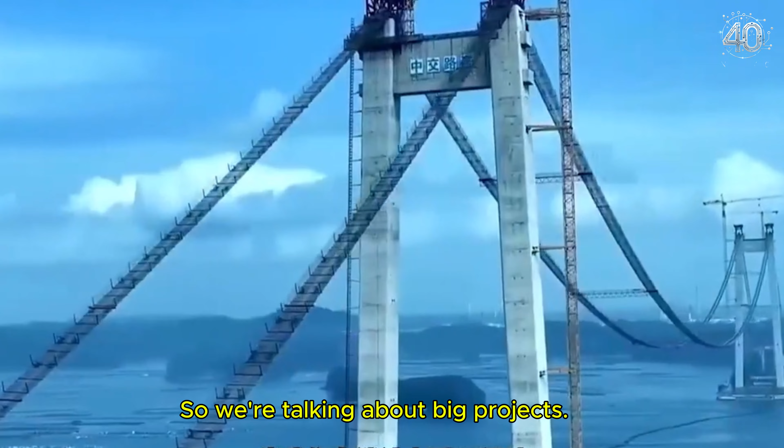Chinese engineers have always been known for their amazing construction speed, building incredible engineering projects. World-renowned Chinese engineers are like superheroes in construction. They are actively involved in building large engineering projects to accommodate their country's growing population and rapidly advancing economy and technology across the vast land of China. Bridges and dams are not just a link between two sides of a river, they are also a shining pearl of Chinese engineering technology.

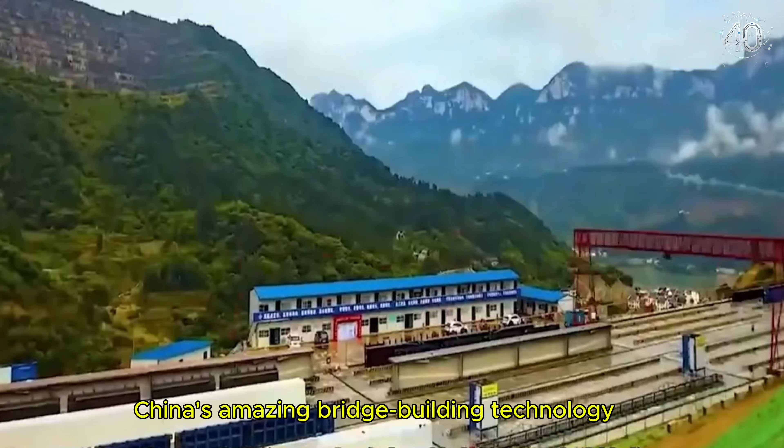Let's experience it together today: China's amazing bridge building technology, and a super dam on a river.

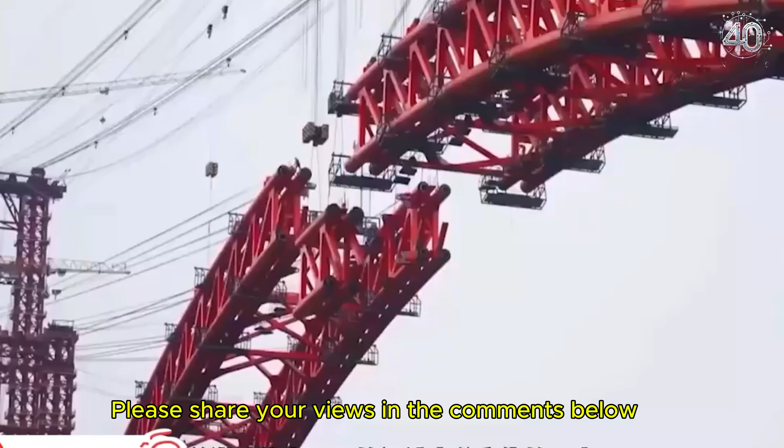Not much to say, let's start an extraordinary journey. So let's start with bridges, as the crystallization of human wisdom, vividly displayed in China.

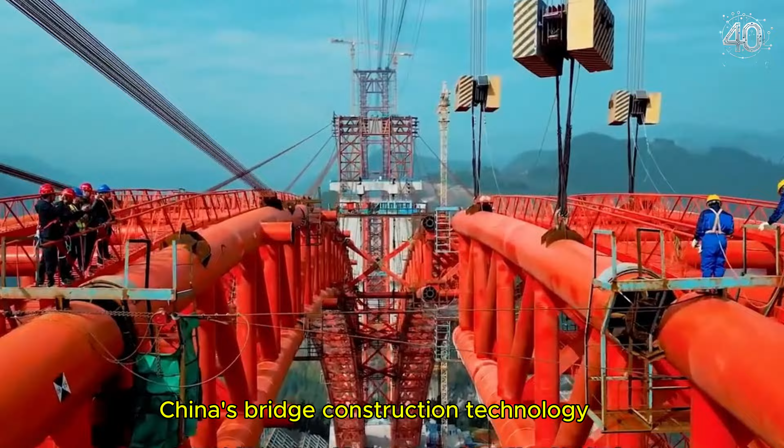From the ancient Zhaozhou Bridge to the modern Hong Kong-Zhuhai-Macau Bridge, China's bridge construction technology is already at the forefront of the world. Every bridge is an epic, recording the hard work and wisdom that creates the Chinese people.

From the ancient Zhaozhou Bridge, with its unique arched structure and exquisite stone carving art showing the wisdom and ingenuity of the ancients, to the modern Hong Kong-Zhuhai-Macau Bridge, with its massive scale, sophisticated technologies, and innovative ideas, it has become a wonder in the history of world bridges.

This bridge not only connects Hong Kong, Macau, and Zhuhai, it also shows that China is a leader in the field of modern bridge construction.

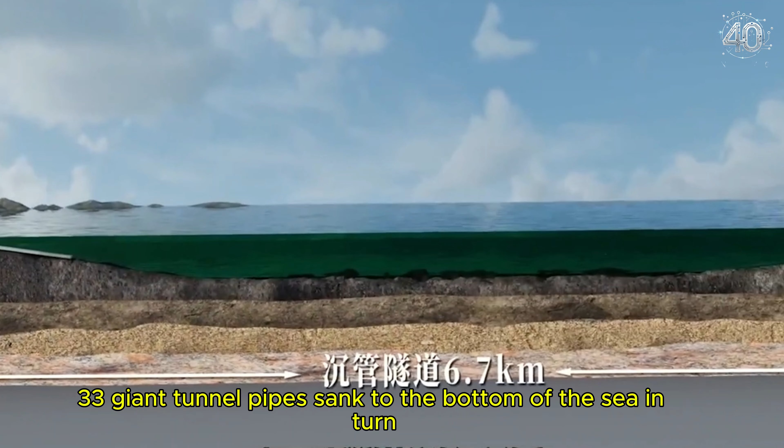The Hong Kong-Zhuhai-Macau Bridge crosses the sea and gradually sinks into the water at its submerged terminus. 33 giant tunnel pipes sank to the bottom of the sea in turn, forming a 6.7-kilometer long underwater tunnel. The tunnel not only leaves enough room at the sea surface, it also greatly reduces the impact of the structure on ocean currents.

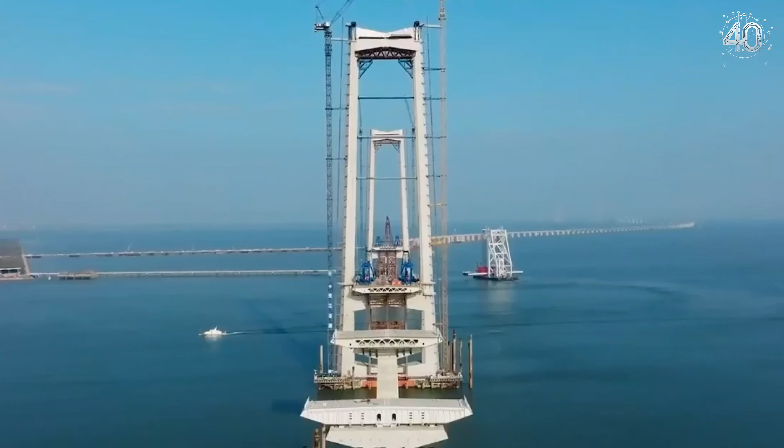Artificial islands on both sides secure the undersea tunnel and create a seamless transition between connecting bridges. Through this combination, the longest sea bridge in the world opened a path across the vastness of the sea. In addition, the Shenzhen-Zhongshan passage is under construction.

It's also a great miracle in the history of China's bridge construction. The Shenzhen-Zhongshan corridor connects Shenzhen, Guangdong, and Zhongshan City, featuring a 270-meter high bridge tower.

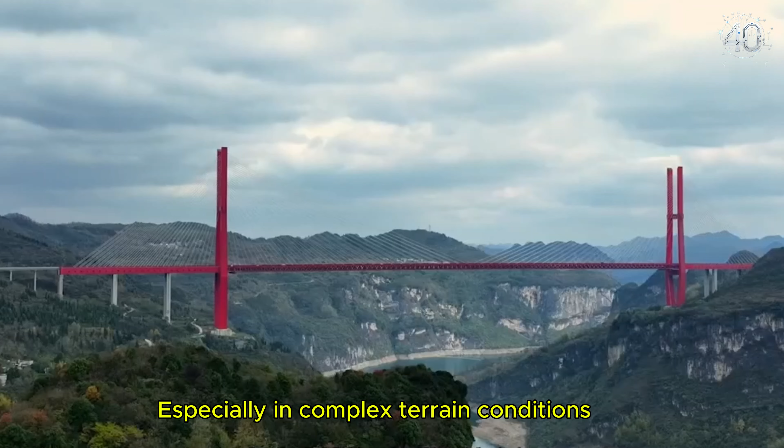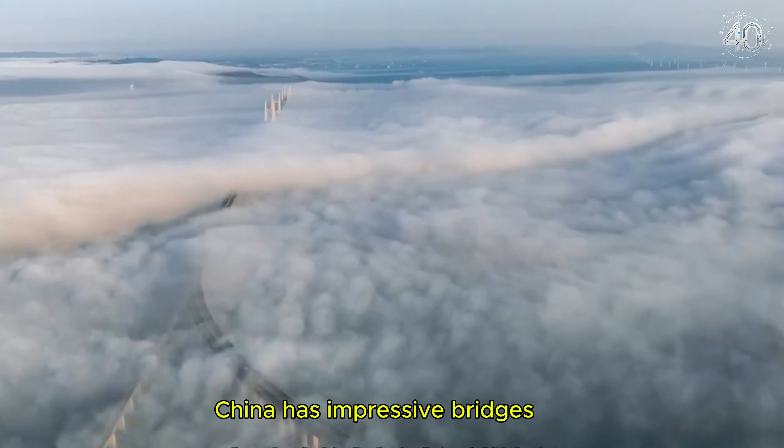They not only solved technical problems, they showed the world the grandeur of Chinese bridges. So far, China has more impressive bridges than any other country. But have you ever considered that every bridge has its own unique story?

The Beipanjiang Bridge is located at the junction of Yunnan and Guizhou provinces. It is one of the tallest bridges in the world, with the bridge deck to river surface up to 565 meters.

That's 200 stories tall. However, in the eyes of American media, this bridge was labeled a copy, publicly questioned and ridiculed by American experts over the speed at which it was built. They believe China cannot rely solely on its own efforts to build such a spectacular project.

They claim it must have copied American design and methods. This statement shows not only a lack of understanding of China's construction level and innovation, but also downplays China's truly amazing development.

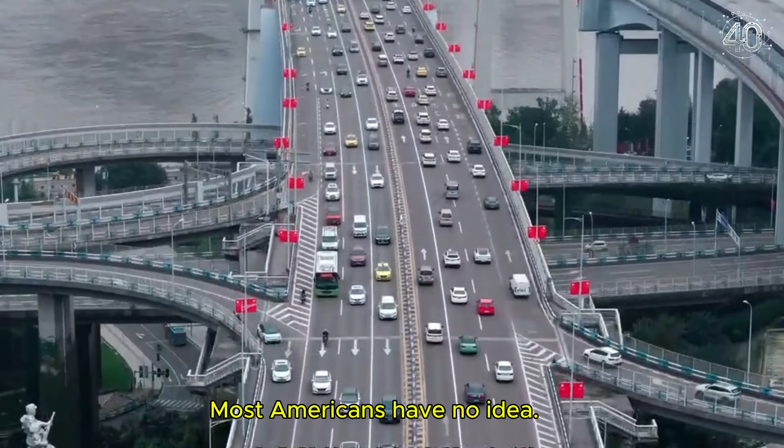Most Americans have no idea how China has developed now, and to what extent the world has been amazed.

America should be inspired by China, and learn from them, rather than demonizing them and making them enemies of the United States. China is a model of hard work and dedication.

This used to be an American value. China is also a good example, explaining what happens when the government allocates resources focusing on the best interests of the people, rather than diverting resources to wars with the rest of the world.

Anything is possible. So is the Beipanjiang Bridge really copying American technology? Is China really incapable of building such a bridge? Let's uncover the truth together.

China's involvement in bridge construction has a long history and rich experience, achieving many independent design and technical achievements. China is a land of bridges.

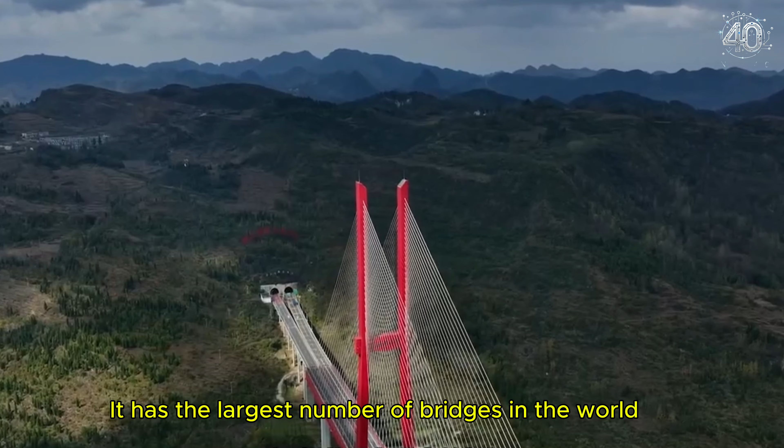It has the largest number of bridges in the world, with huge scale. Bridge construction is an important support for China's economic development, and also the essence of Chinese engineering technology.

Americans didn't want to believe that China, which they believe is still far behind, could build such an amazing bridge in just 3 years. But the results of the field inspection by the expert group went beyond their imagination.

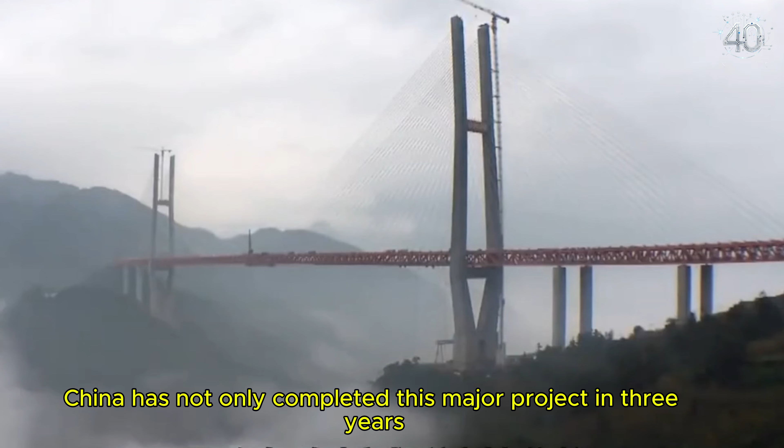China completed this major bridge construction project in 3 years, breaking several world records. The total length of Beipanjiang Bridge is 1,341.1 meters, adopting a 4-lane standard. The design speed is 80 kilometers per hour, costing 1 billion, built with a variety of advanced technologies.

So techy. Since its construction, the bridge not only optimized the traffic environment between the two places, but also ended the history of Xuanwei and Shuicheng being blocked off from the expressway.

However, before building this bridge, due to the complex topography of the Beipanjiang area and bad climate, the Yunnan-Guizhou Plateau belongs to the mountain type, the road is bumpy. Therefore, residents on both sides of the canyon could only travel between the two places on foot, and the economy was lagging behind.

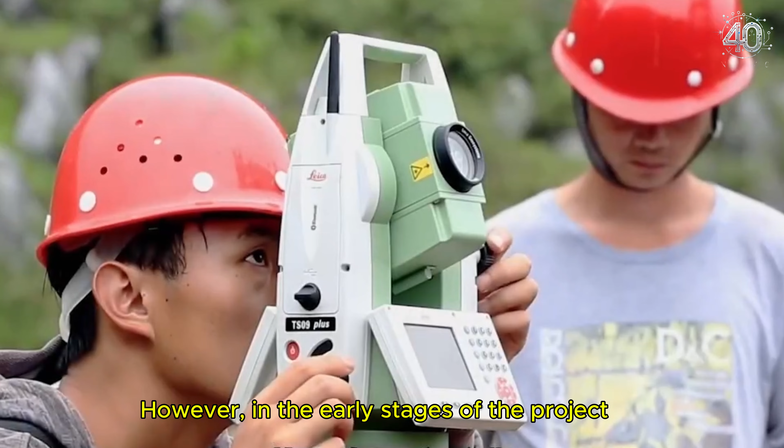To improve this situation, China decided to build a canyon bridge between the two places. Since then, the Beipanjiang Bridge gradually began to take shape. However, in the early stages of the project, it aroused many doubts and ridicule internationally.

This also originates from the junction of the two provinces, where the environment was extremely hostile, with caves everywhere. The difficulty and danger of construction can be imagined.

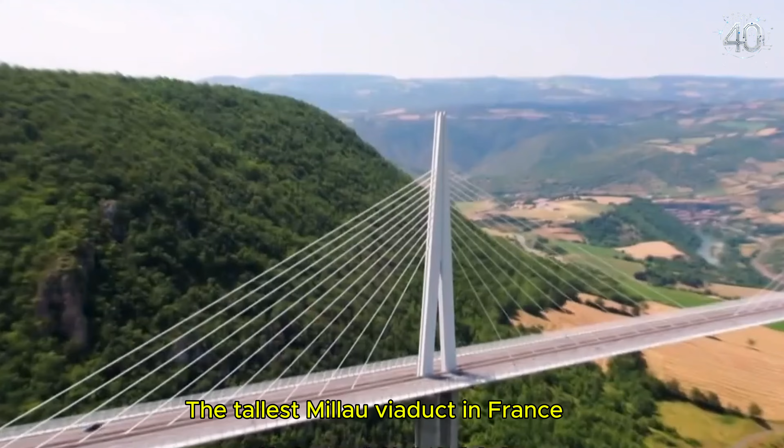At the same time, the bridge deck design called for a distance from the river of 565.4 meters - that's the height of a 200-story building, almost 300 meters higher than the tallest Millau Viaduct in France. For China, this is without a doubt a whole new challenge.

Facing these world-class challenges, how did China overcome them one by one? Let's start with this.

Only the bridge deck can be raised. However, caves are prone to collapse during construction, which had a huge impact on construction.

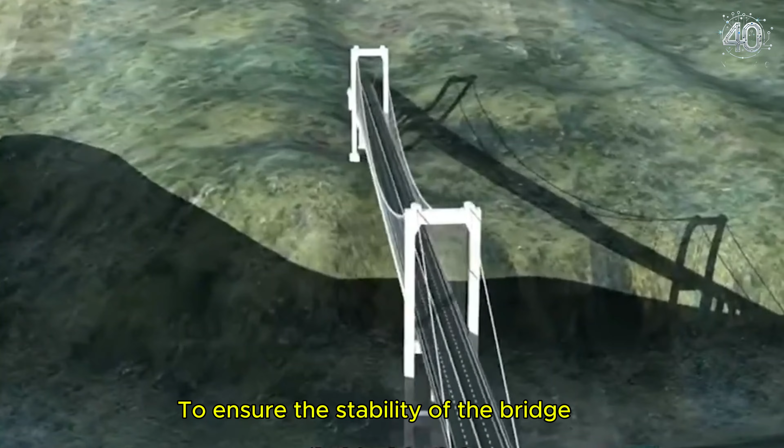To ensure the stability of the bridge, Chinese engineers initially planned to build a suspension bridge, but shipping large quantities of materials proved difficult. So the technical team overturned the idea and adopted a cable-stayed bridge design instead.

They connected the bridge deck by supporting steel cables. This approach is also known as a cable-stayed bridge, using cables to pull up the deck.

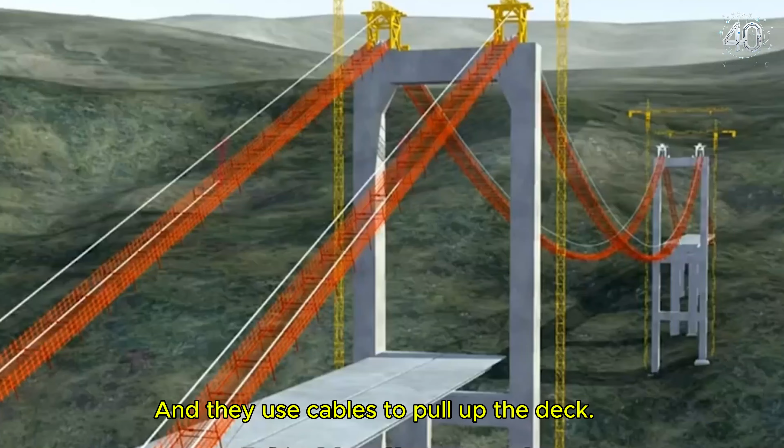The Beipanjiang Bridge uses a total of 244 cables, each with a diameter of only 5.1 millimeters. Their tensile strength exceeds 1,860 MPa, far exceeding international standards.

After solving this puzzle, they encountered new challenges and problems. No matter what kind of suspension bridge is built, engineers use an anchor pier - this core component is the main girder support of a suspension bridge.

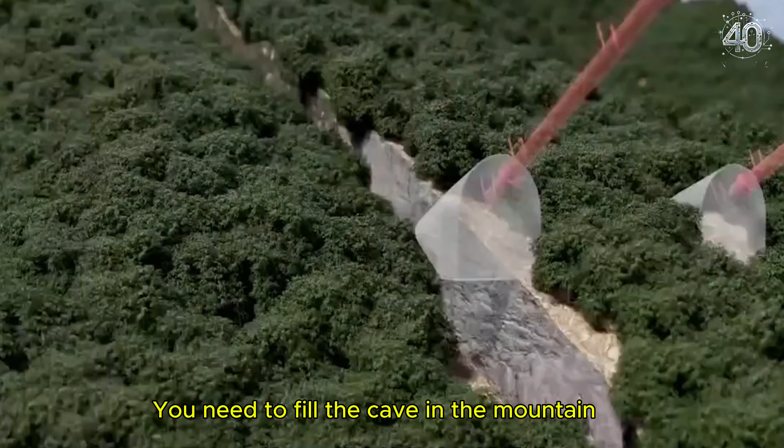If the Beipanjiang Bridge also used this component, they would need to fill the caves in the mountain and construct tens of thousands of square meters of concrete on both sides of the bridge. But doing so would greatly upset the balance of the mountain.

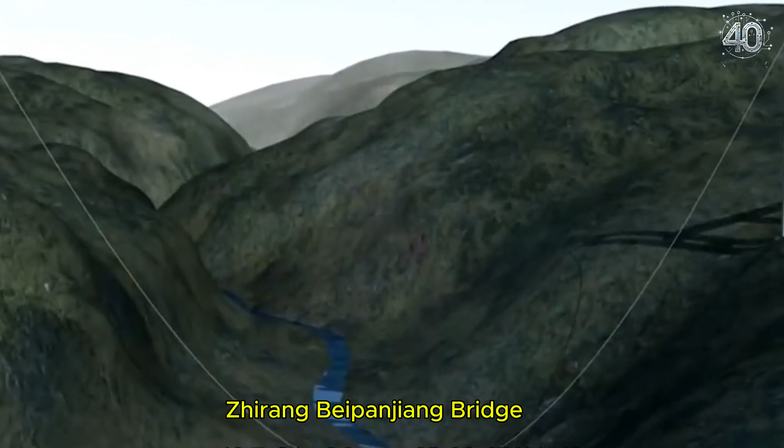To avoid damaging the mountain, experts came up with a bold new approach: building cable bridges. They designed the Beipanjiang Bridge with auxiliary piers, taking the piers on both sides as a guide.

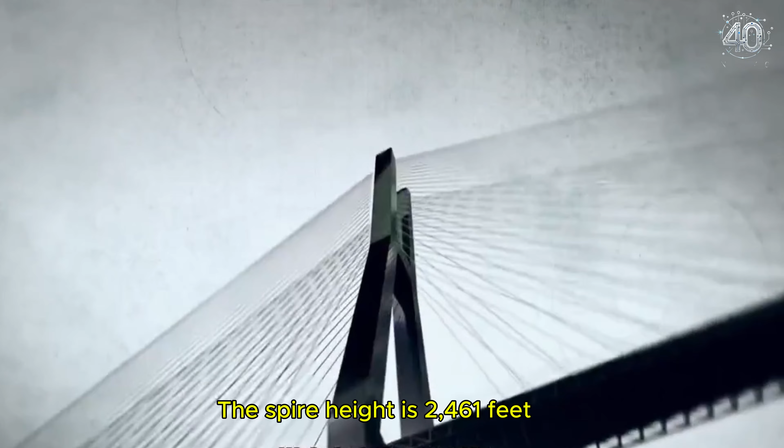However, this brought new challenges to the height of the bridge. Even with innovative design, the bridge deck is still close to the ground - 100 meters high. The spire height is 2,461 feet from valley to spire, equivalent to two Eiffel Towers combined.

And the bridge deck has to bear a weight of more than 52,310 tons. Such tolerance is equal to the weight of 5 Titanic ships combined.

So the pier should not only play a supporting role, but also needs to withstand the huge friction generated by the horizontal movement of the steel balance beam. It's very hard to do.

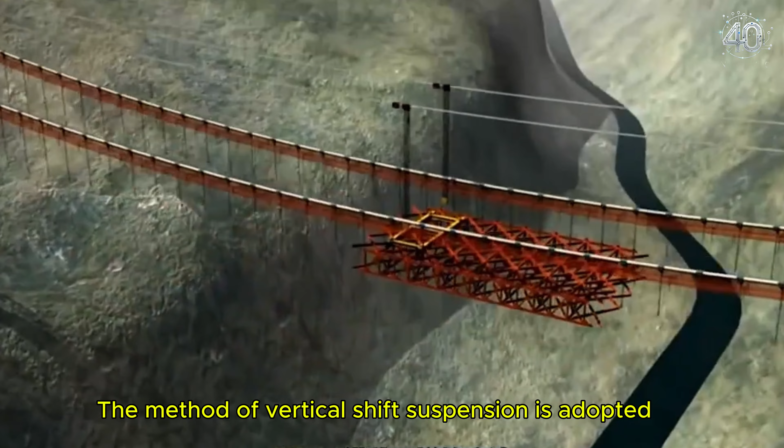After much discussion, Chinese engineers decided to give up this practice. The method of vertical shift suspension was adopted, and multiple computer simulations were run to ensure the security of the program.

When connecting bolts to steel beams, the construction team made a decision that broke with tradition, using plastic bolts instead. This move was also met with many doubts.

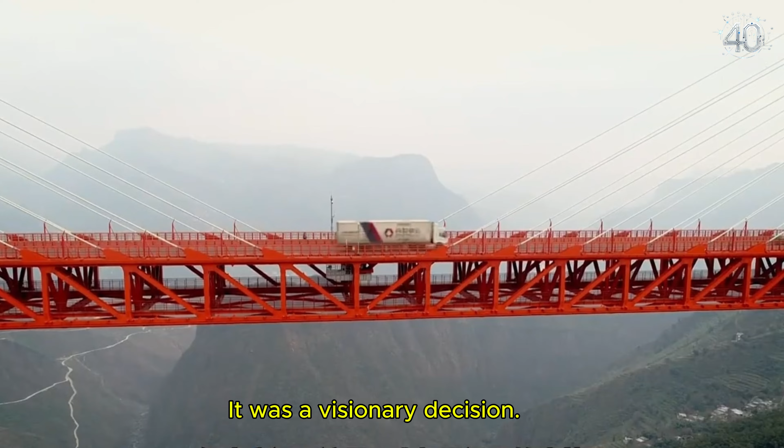But it turns out it was a visionary decision. After many comparisons and tests, Chinese engineers discovered plastic bolts are effective in terms of wear resistance and rust resistance, better than iron bolts, greatly improving the wind and earthquake resistance of the bridge, and extending its service life.

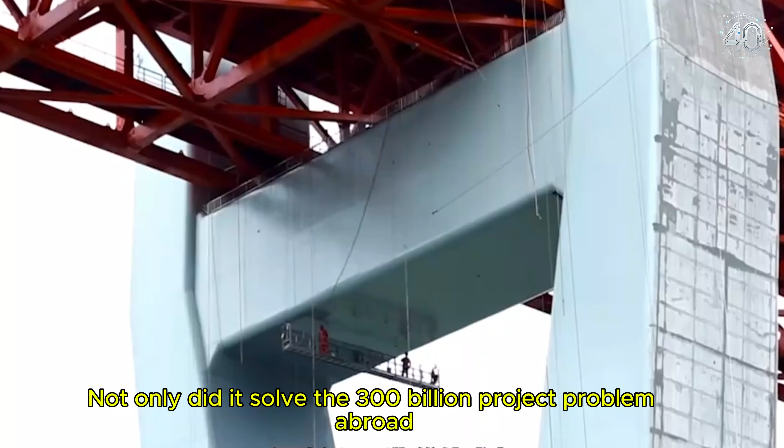So this little piece of plastic not only solved a problem that had stumped a 300 billion dollar project abroad, it also decreased post-maintenance costs. The Beipanjiang Bridge also uses a large number of cutting-edge technologies, using the latest scientific research findings, simulation analysis by computer, and pre-demonstration through 3D modeling.

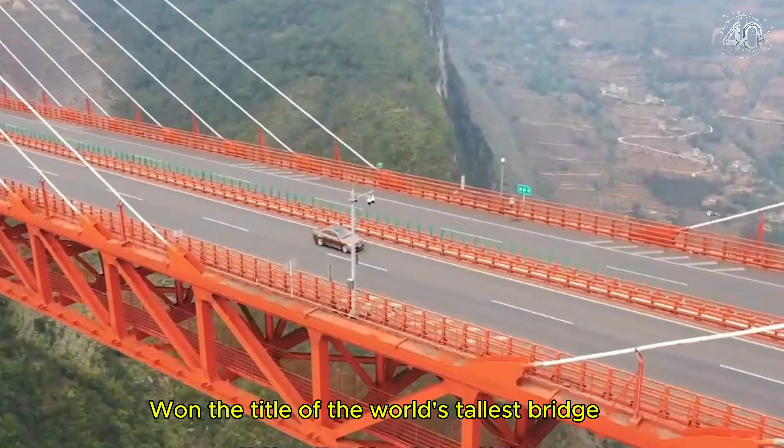After 3 years, the construction of the Beipanjiang Bridge was completed in 2015 and opened to traffic smoothly. In 2018, at the 35th International Bridge Conference, it won the Gustav Lindenthal Medal and the title of the world's tallest bridge, alongside the Sidu River Bridge - a magnificent suspension bridge characterized by its unique construction method, which became the focus of the world's attention.

In the history of bridge construction, he introduced rocket technology for the first time, to deliver the pilot cable, accomplishing this unprecedented feat. The bridges use heavy steel cables.

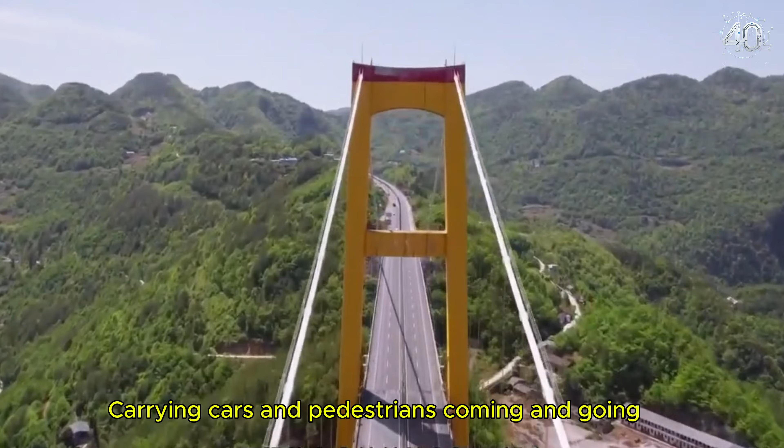Standing in the canyon like two dragons, they are composed of tens of thousands of tons of high-strength steel wire woven together. It's sturdy, firmly fixed on the piers on both sides of the river. These cables hang down from the main cables, connected to the bridge like countless life lines, carrying cars and pedestrians coming and going, guaranteeing their safe passage.

However, during the construction of this bridge, engineers faced tremendous challenges. Before laying the main cable, a pilot cable must first be sent to the other side of the canyon. The task seems simple, but it's hard.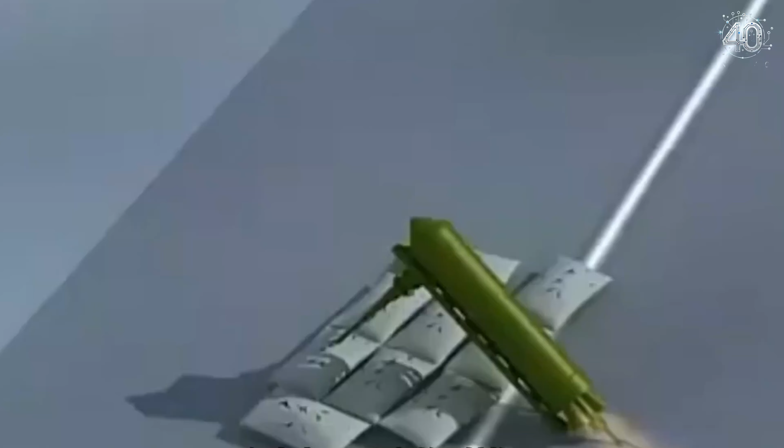They thought it through carefully, and finally came up with a bold and innovative solution: rockets are used to transport the pilot cable. It's a crazy idea, but through the ingenious ideas of Chinese engineers and bold innovation, it became reality.

Engineers communicated with nearby garrisons and acquired a military rocket. Then they replaced the warhead with a lead wire. After orchestrating and preparing, the rocket successfully carried the pilot cable and sent it to the other side of the canyon.

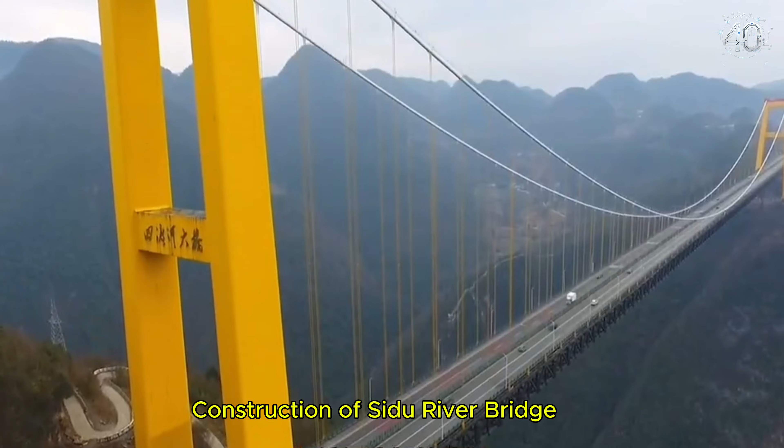This innovative solution not only solved a major problem in the construction of the bridge, it fully demonstrates the wisdom and huge innovation ability of Chinese engineers. The construction of the Siduhe River Bridge was ingeniously conceived by Chinese engineers, and the fruit of bold innovation had a huge international response.

Many international bridge experts said they never thought of it before, that they could use rocket technology to build bridges.

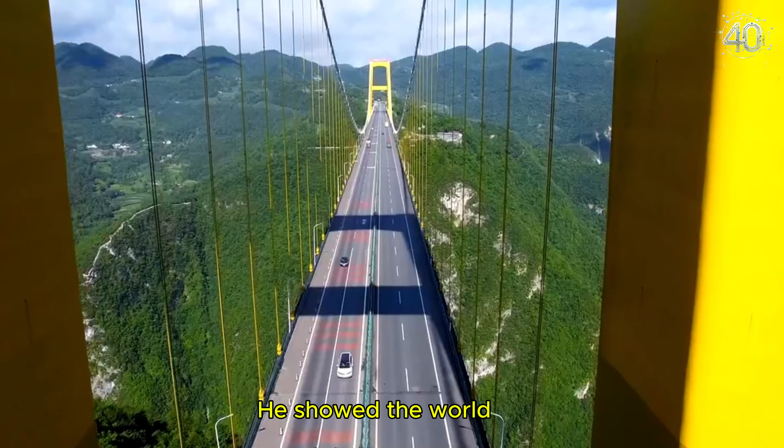This bridge is not just a transportation hub connecting the two sides of the strait. It is also a symbol of the wisdom and innovation of Chinese engineers. It showed the world China's leading position and strong strength in the bridge construction field, and also provides valuable experience for future bridge construction.

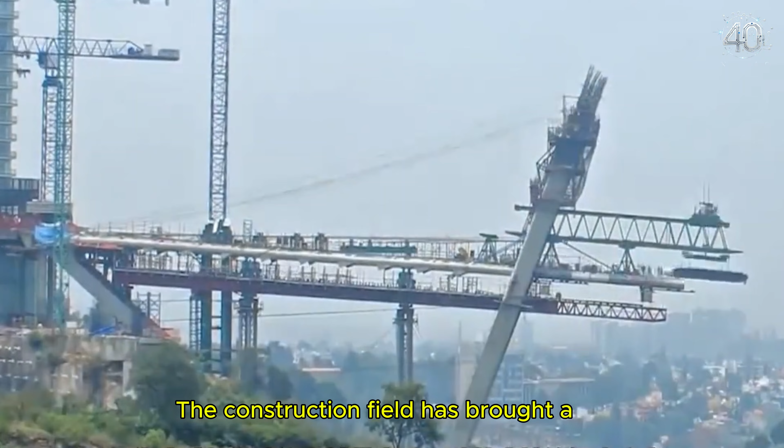Construction of the Siduhe River Bridge not only highlights the excellence of Chinese engineers' innovation ability, it has also brought a revolutionary solution to the global bridge construction field. Although Chinese engineers made this technology public, due to its high requirements and difficulty, there are no other bridges yet worldwide that use the same technology for construction.

This allows the Siduhe River Bridge to remain the only one in the world built using rocket technology, a unique status for the bridge.

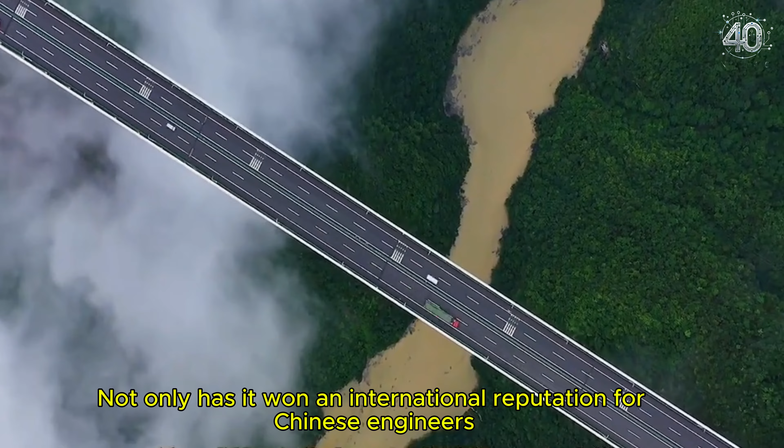This achievement has not only won an international reputation for Chinese engineers, it also impressed those in Western countries who used to despise Chinese technology. They have to sigh that China's innovation strength has stood at the forefront of the world.

As a shining pearl of technological innovation, the bridge serves China on the global stage, establishing a new image and demonstrating the growing national strength and technological strength, comparable to bridges and China's mega dams.

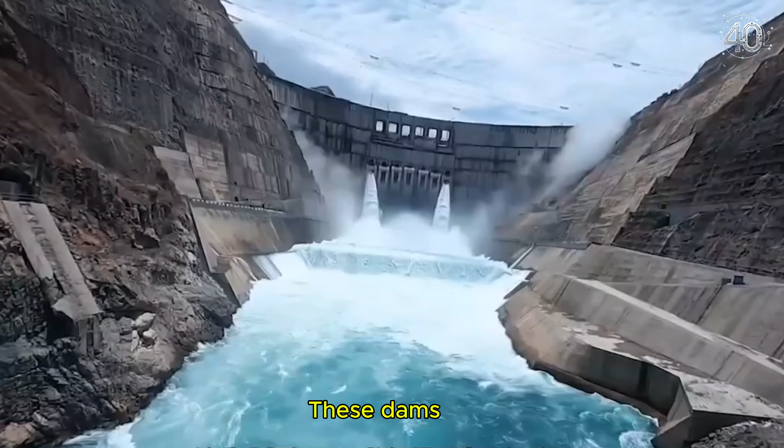These dams, lying on the river like dragons, regulating the flow of water, bringing fertile irrigation to the Chinese people, and clean energy. From the Three Gorges Dam to the Beipanjiang Dam, every dam is the pinnacle of Chinese engineering.

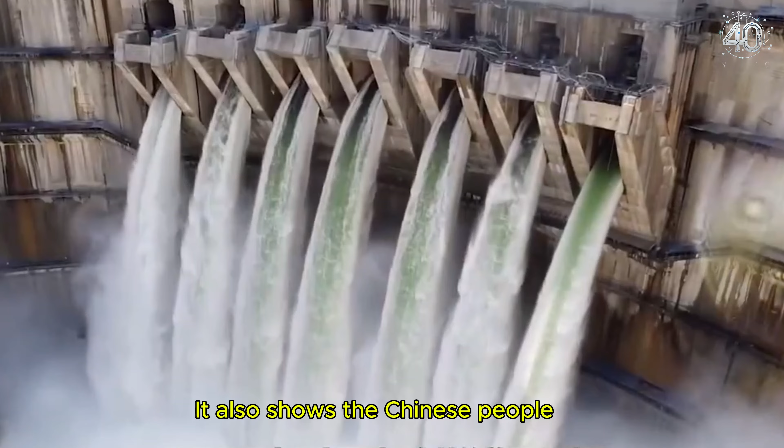They not only have strong flood defenses and multiple functions such as power generation and irrigation, it also shows the Chinese people's respect for and use of nature. Behind these dams lies the wisdom and sweat of countless engineers and working people, who used their own hands to write a brilliant chapter in China's dam construction.

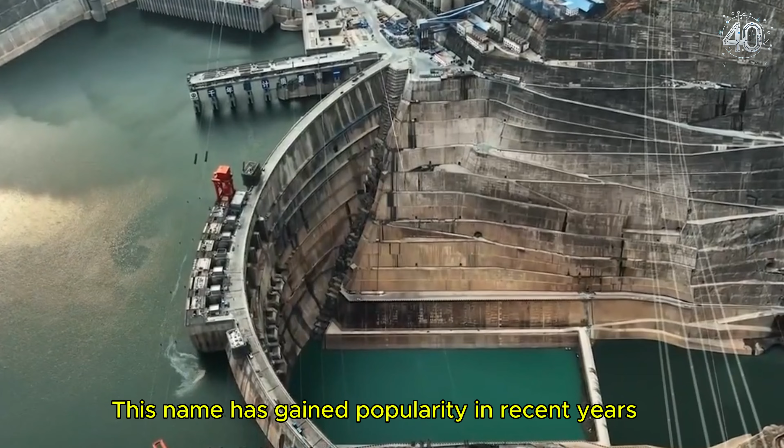Baihetan Hydropower Station, this name has gained popularity in recent years. It is not just a part of China's hydropower project, it is a miracle in the history of global hydropower construction.

Its maximum height is 289 meters, equivalent to a 100-story skyscraper, but its narrowest point at the top is only 14 meters wide. Although the dam is extremely slender, it can withstand 16.5 million tons of thrust, enough force to send more than 15,000 Long March 5 rockets into the sky.

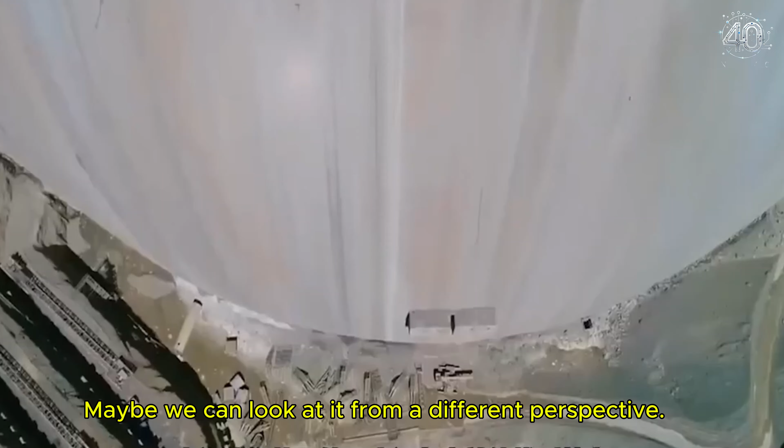How did he do it? Maybe we can look at it from a different perspective to find the answer.

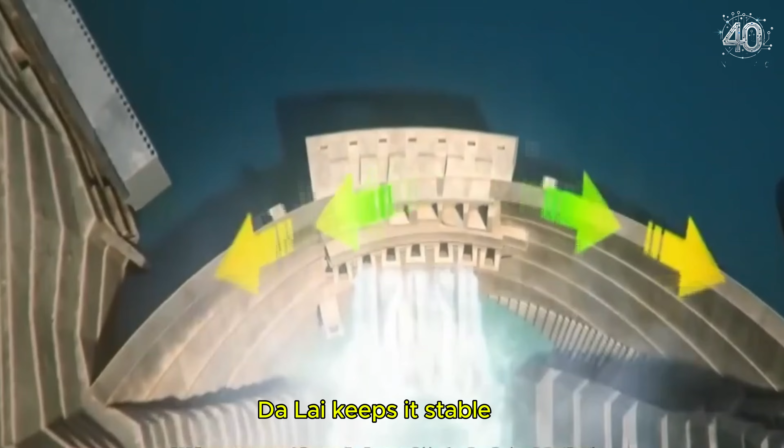Viewed from above, Baihetan Dam adopts an arched structure, commonly known as an arch dam. This structure can transfer the thrust of the current to the sides of the mountain. Since mountains share the load, arch dams don't need to be as massive as gravity dams to keep stable. As a superstatic structure, the arch dam is highly secure, and its overload capacity can reach more than 10 times the design level.

Baihetan Hydropower Station is located in the lower reaches of the Jinsha River. It is the largest hydropower project under construction in the world, and the most technically difficult. Its completion will have a profound impact on China's energy structure, and on flood control, shipping and other aspects of the Yangtze River.

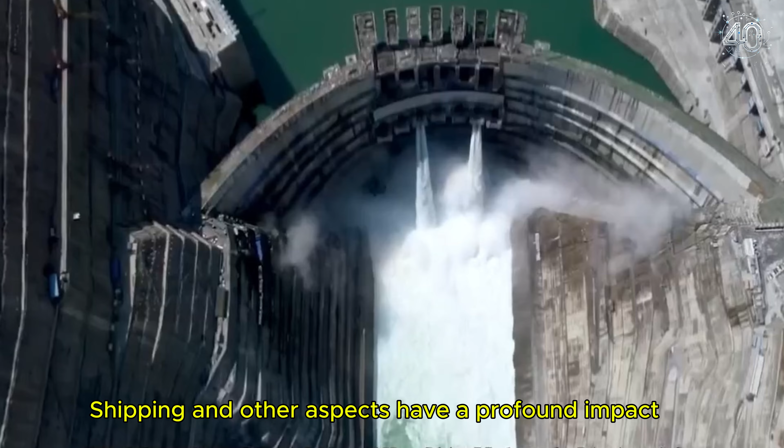But we won't talk about these high-profile topics today. Let's talk about those shocking, mind-blowing concrete pouring processes. The pouring process of Baihetan Dam is an engineering marvel. Imagine that.

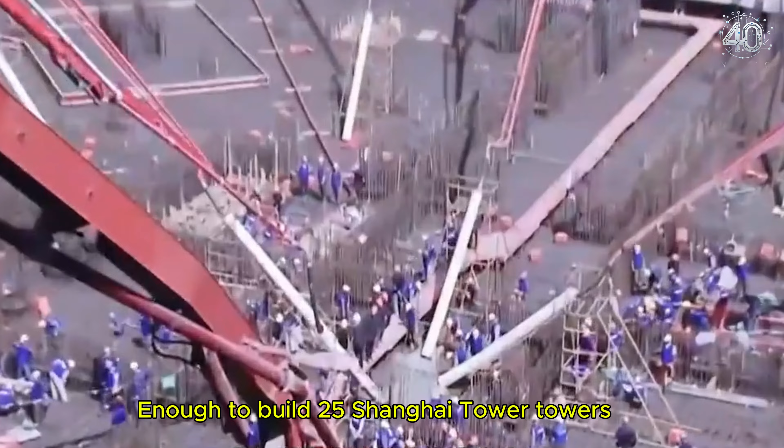To build this dam, the total amount of concrete required is enough to build 25 Shanghai Towers. The scale is amazing.

And the way it's poured is even more eye-catching. Seven giant cables work together, lifting a tank filled with 30 tons of concrete, spanning hundreds of meters of gorge. Precise pouring. It's not just a test of technical mastery, it also shows the wisdom and courage of engineers.

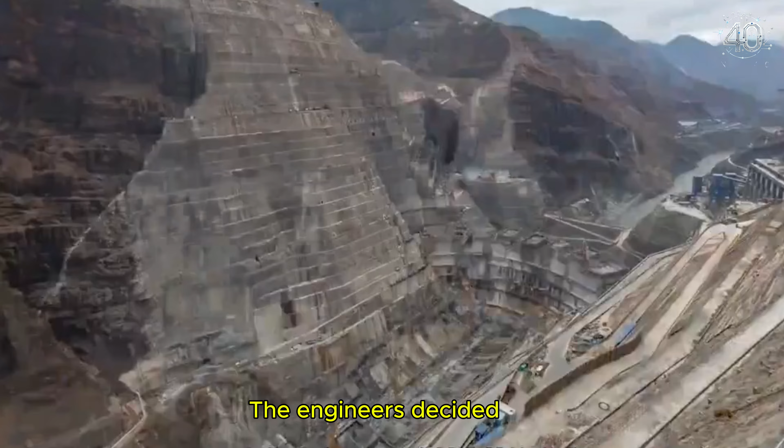To ensure the structural integrity of the dam, engineers decided to adopt a one-time pouring method. This means that over a period of up to 1,500 days, workers have to work around the clock, pouring without stopping.

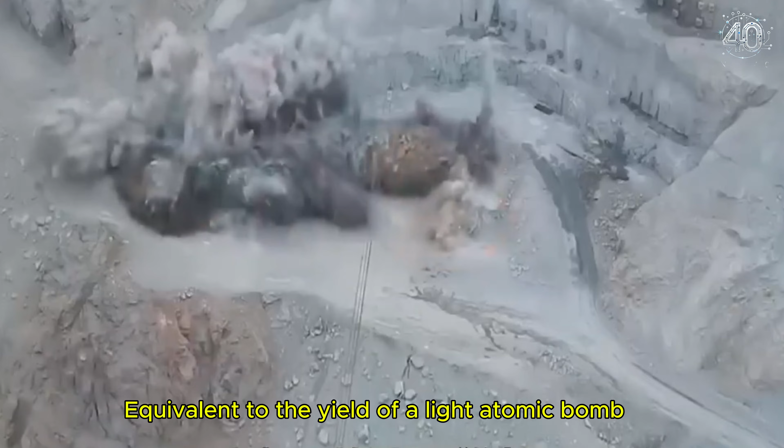To meet the dam's demand for stone, the amount of explosives used by engineers to mine rocks is equivalent to the yield of a light atomic bomb, with up to 200 dump trucks per day walking through the construction site, sending these stones to the stone factory in a steady stream.

For processing. However, during the concrete pouring process, how to prevent heat of hydration from causing dam temperatures to rise and create cracks became a great problem to solve.

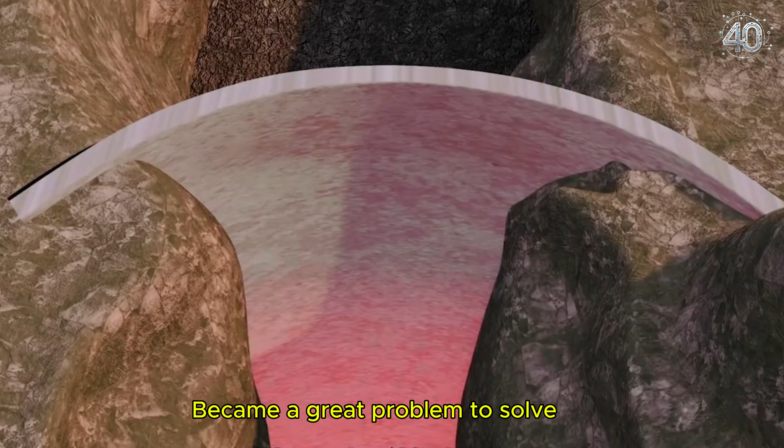Chinese engineers showed their innovative spirit. They used a low-heat cement and strictly screened the material intake. The crack resistance of concrete has been greatly enhanced.

During the mixing process, engineers also added crushed ice to ensure the concrete can maintain a low temperature of 6 degrees Celsius. Vehicles responsible for transporting concrete are all equipped with thermal insulation, to ensure that when the concrete arrives at the pouring site, the temperature can be controlled at 12 degrees Celsius.

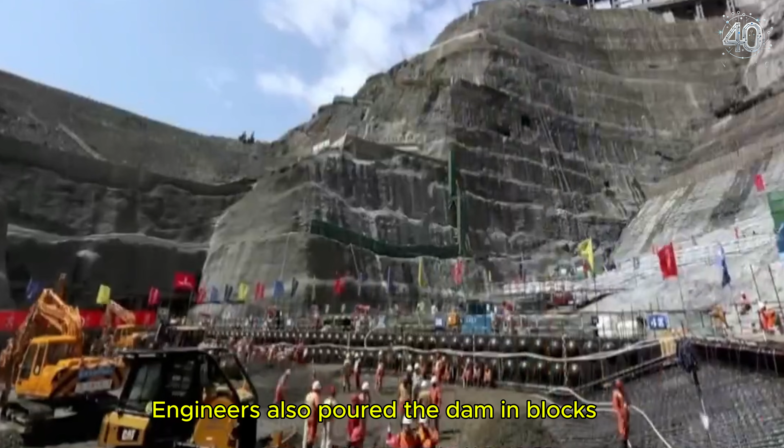For better control of dam temperature, engineers also poured the dam in blocks. By installing temperature sensors, field workers constantly measure the temperature of each area. The measurement data is uploaded in real-time to the central control system.

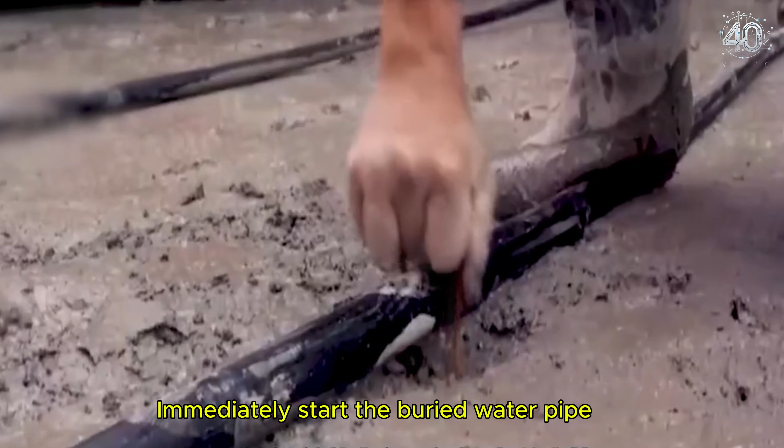This control system is like the nervous system of a dam, responsible for collecting and analyzing various information, including excavation, grouting, concrete pouring, and other data. Once a building area is found to have an abnormal temperature, the central control system immediately starts the buried water pipe for automatic cooling, ensuring that construction of the dam can proceed smoothly.

Next, we come to the other end of the dam construction. We see that Chinese engineers are currently devoted to a spectacular project.

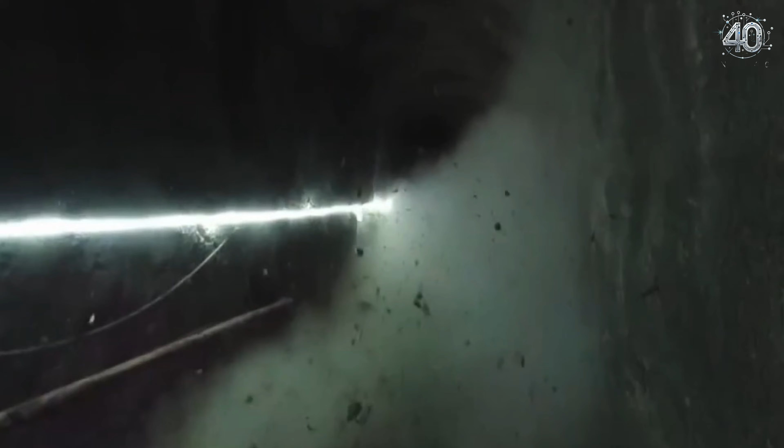To dig up giant caverns in order to install the world's largest generator sets, facing the challenge of how to embed 16 gigantic million-kilowatt generator sets into the structure within unstable mountains. They did an amazing job, showing the professionalism and wisdom of the team.

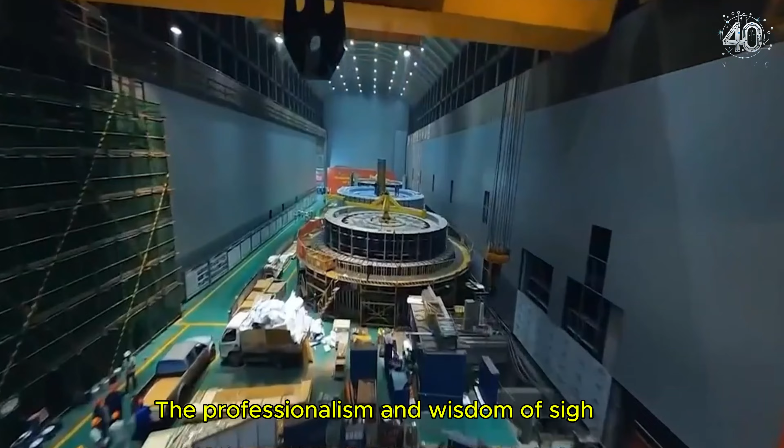The engineers first went up and down the mountain. Each built a 438-meter-long cavern, a huge space 34 meters wide and 89 meters high. This is large enough to accommodate a Liaoning aircraft carrier. The amount of sand and gravel excavated is enough to fill 2 Hangzhou West Lakes.

However, in mountains with two staggered rock belts, digging such a huge space and ensuring its stability is certainly a daunting task. To ensure safety, the engineers decided to grout the mountain before excavation.

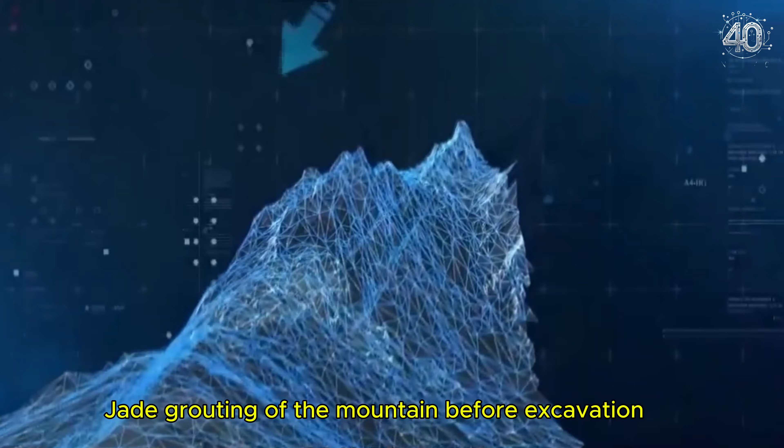It's like gluing a loose mountain into a solid whole. At the same time, more than 4,000 sets of detectors were installed on the mountain.

These instruments are keen sentinels, monitoring any small changes in the mountain at all times. Once there is a safety concern, the testing center will immediately issue an early warning.

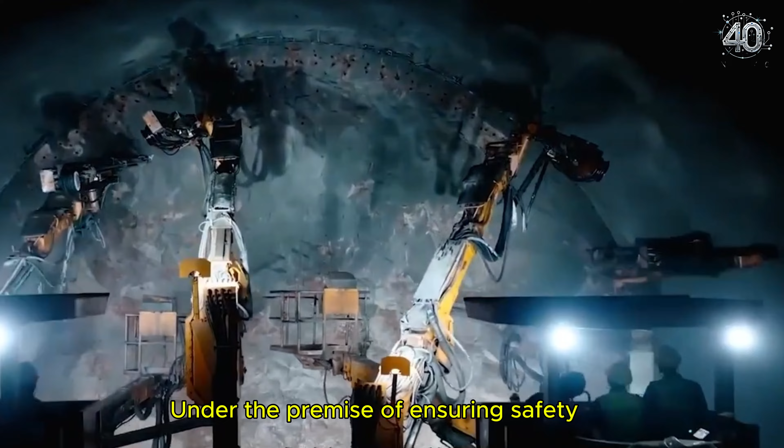Under the premise of ensuring safety, the engineers began the dynamic excavation work. They cleverly excavated the cave into 10 floors, with stratified excavation from top to bottom, grouting the rock wall with each layer dug. In this way, the cave structure built is like a solid fortress, indestructible.

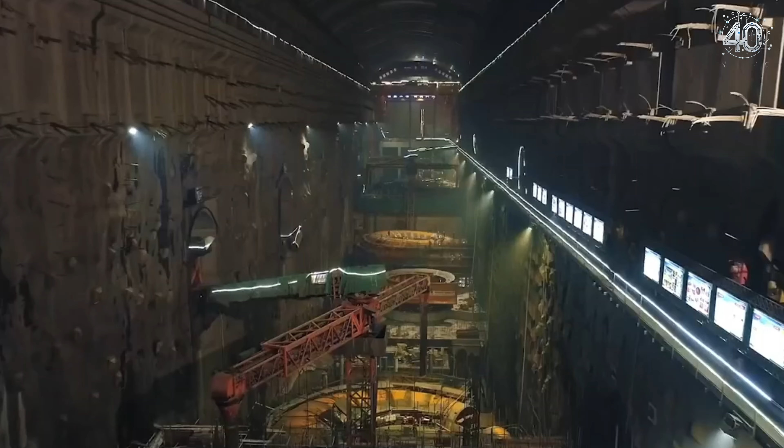When they reached the 4th floor, according to design requirements, a huge overhead crane needed to be installed. The function of this crane is to provide convenience for installing the next hydroelectric generator set, which consists of a turbine and a generator.

Its working principle is to divert water from the dam's 200-meter-high water inlet hole, through huge pipes on both sides of the dam, into the shell of the spiral structure that drives the turbine, converting the impact of water into mechanical energy that drives the generators.

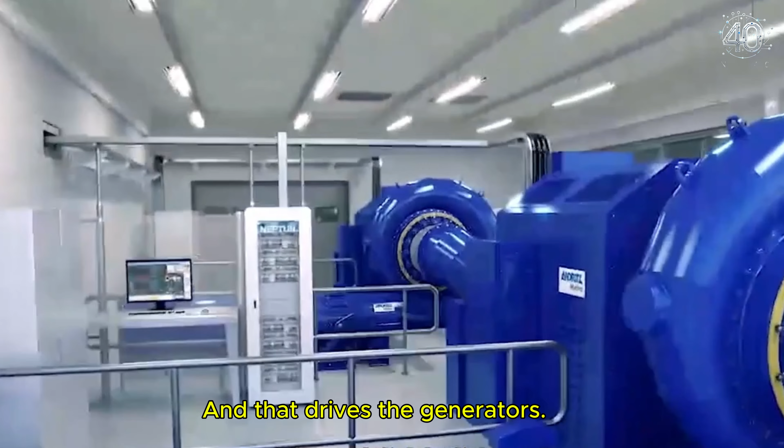To withstand tremendous water pressure, the shell is made of special steel. To turn a 1 million kilowatt generator, you need a very big wheel. It's the hardest thing in the world to make.

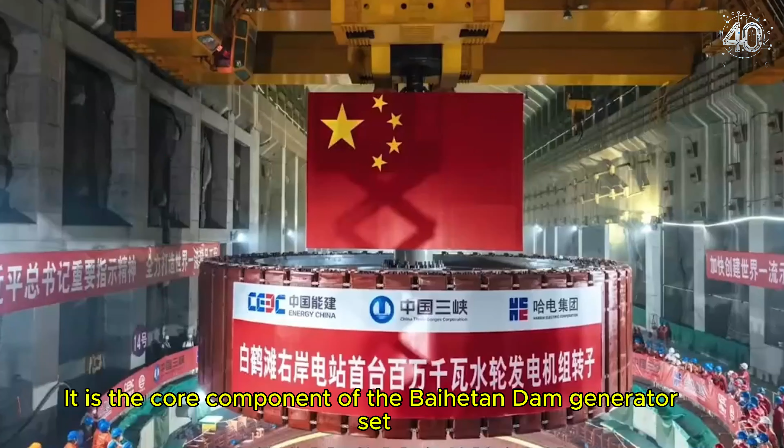This 350-ton water wheel is the core component of the Baihetan Dam generator set. In accordance with safety standards, the requirements for the dynamic balance of a water wheel are extremely strict — the deviation per kilogram cannot exceed 1.5 grams per millimeter.

It's incredibly difficult to make, but Chinese engineers did not back down. It took them 5 years, and finally they built the world's largest wheel.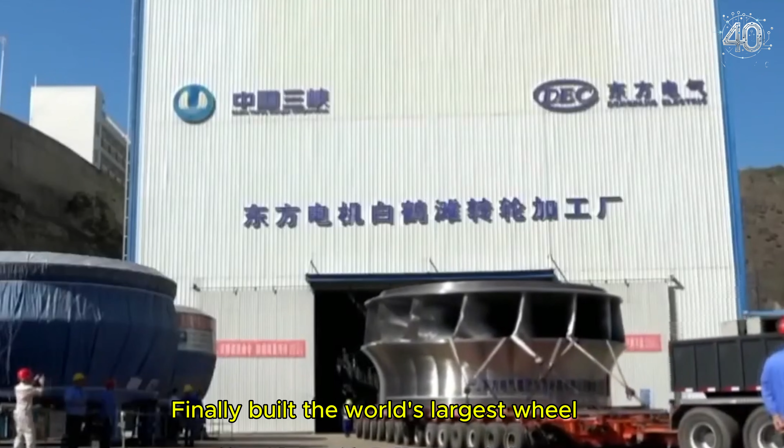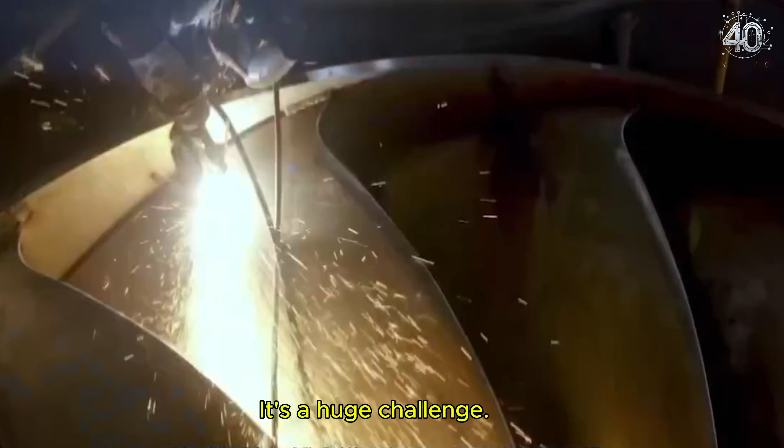After welding is completed, the wheel goes through a series of rigorous tests to ensure maximum performance. Once in good state, it will be sent to the cavern of the dam for installation.

Inside the cave, the overhead crane that can lift 1,300 tons plays a key role. It lifts the wheel steadily and installs it inside the hydro generator.

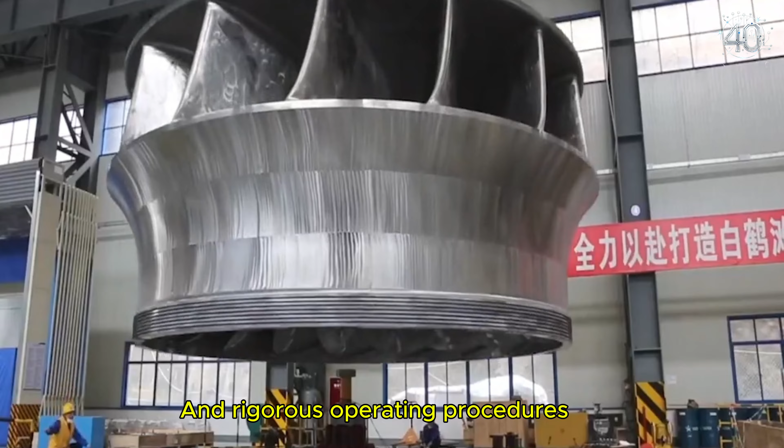After the water wheel is installed, the next step is to install a generator rotor with a diameter of 16.2 meters, several meters high, and weighing up to 2,100 tons. This series of installations requires extreme precision and rigorous operating procedures to ensure the safety of the generator set.

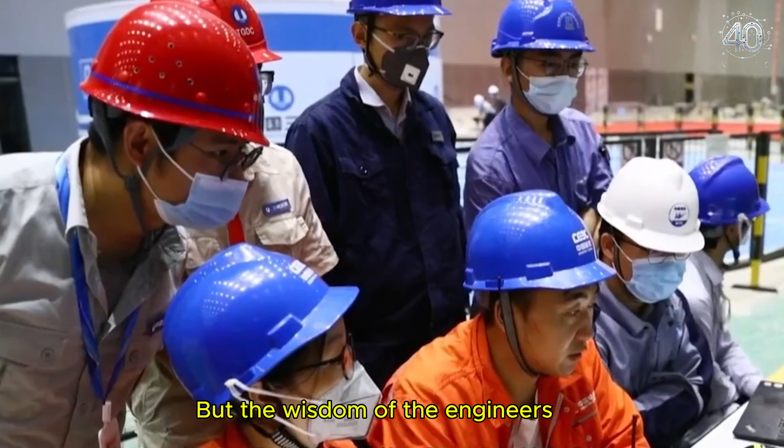Stable operation is essential. When it comes to a bridge crane that can only lift 1,300 tons, you may have some doubts: how can it be competent to hang this 2,100-ton behemoth? But the wisdom of the engineers always goes beyond our imagination.

They cleverly merged the two overhead cranes, forming a powerful combined force. And here's what's even more surprising: they decided to hire a female operator to take control of this merged crane. Such an arrangement perhaps confuses many people.

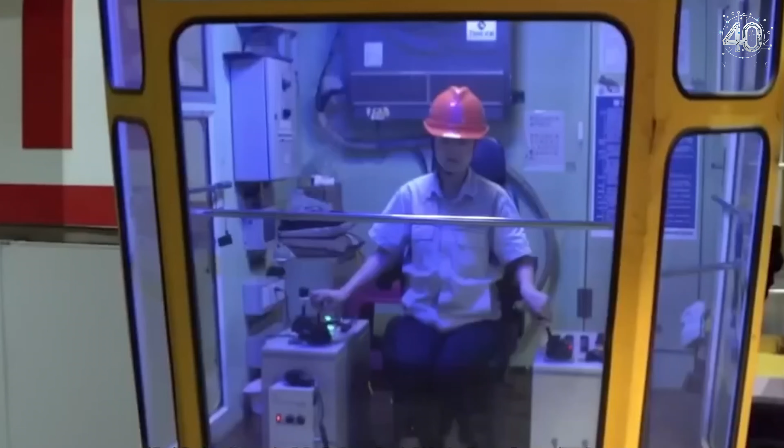Why choose women to drive such large cranes and lifting equipment? Is it because women have unique advantages in certain aspects?

Maybe they are more attentive, with patience and the ability to maintain calm during complex operations, and stable nerves. It's also about breaking down gender barriers, letting more people see the strength and attractiveness of women in engineering.

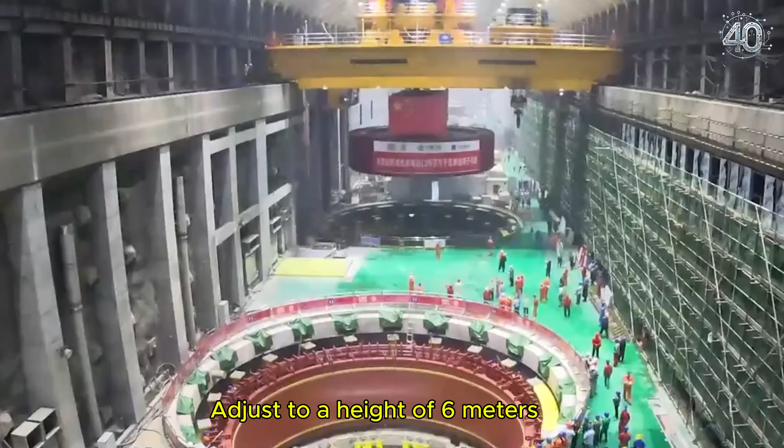Regardless, the female operator demonstrated amazing skill. She took this 2,100-ton rotor, adjusted it to a height of 6 meters, and over a distance of more than 300 meters, moved it steadily to the installation position. This required extreme precision and stability, but she did it. The whole process took nearly an hour.

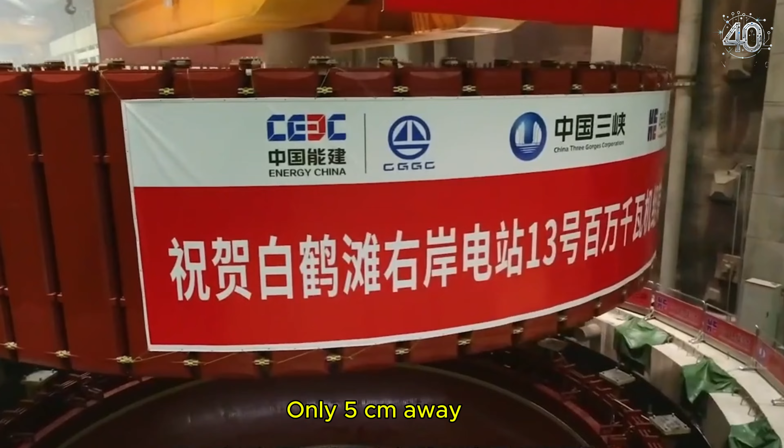However, this was just the beginning of the challenge. The distance between the generator stator and the rotor was only 5 centimeters. This was a huge test for the crane operator. The slightest wrong pull could lead to the failure of the entire project.

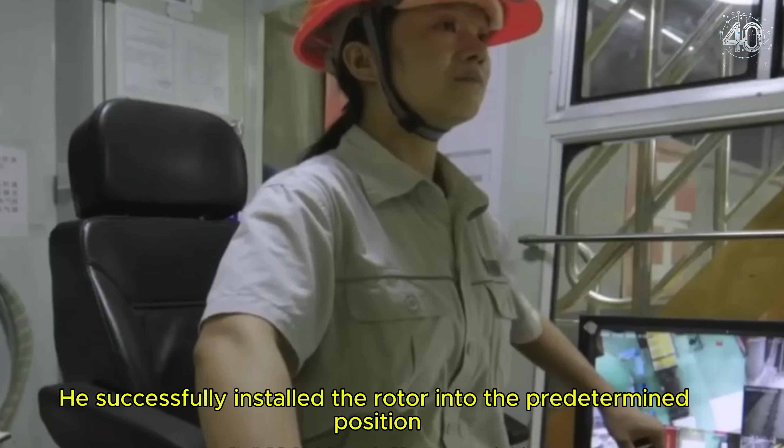But fortunately, he had 12 years of driving experience. With a wealth of experience and close cooperation with ground personnel, he successfully installed the rotor into the predetermined position.

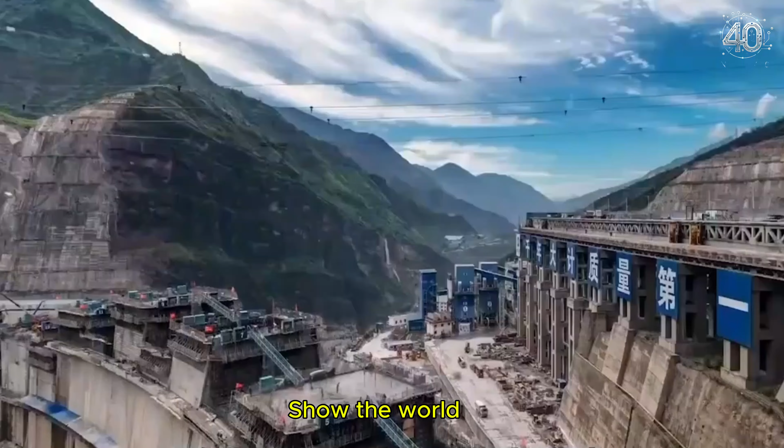It is these Chinese engineers who dare to innovate and challenge themselves with their wisdom and courage, who have created projects that have taken the world by surprise. These miracles not only demonstrate the excellence of Chinese engineering technology but also show the world the courage and commitment of Chinese engineers in building bridges and dams.

It is a shining pearl of Chinese engineering technology, also the crystallization of the wisdom of the Chinese people. It testifies to the brilliant achievements of China's engineering construction and reveals to the world the charm of Chinese engineering technology. In the future, we have reason to believe China will continue to build bridges and dams, creating more miracles.

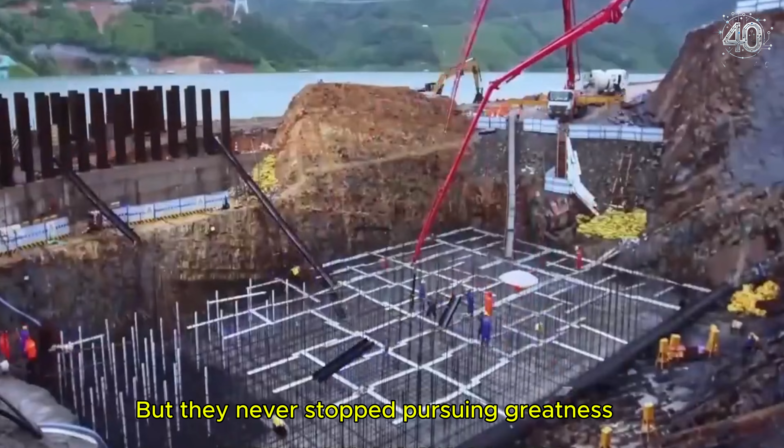China is a resilient country, a determined nation, one that has always earned great respect. Its hardworking people demonstrate perseverance, the essence of dedication. Despite challenges and deep pain, they never stopped pursuing greatness. China's indomitable spirit demonstrates a strong commitment to excellence. In times of trouble, China's unswerving human heritage shines brightly, with profound philosophical insights encapsulating compassion, empathy, and unity.

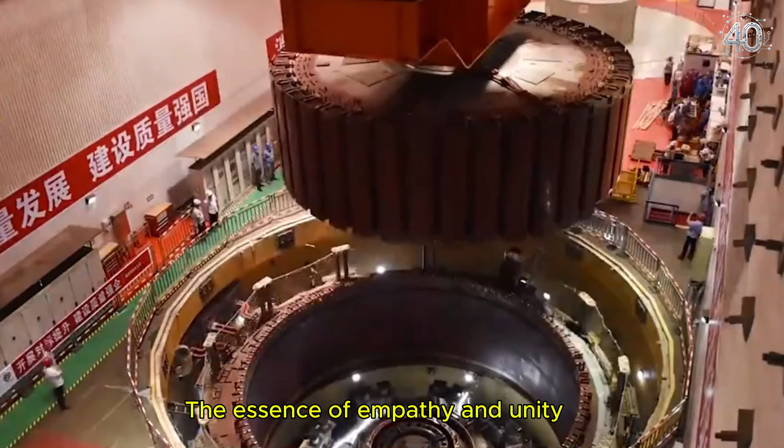Chinese philosophy of life is an infinite source of wisdom, guiding people to a deeper understanding of human experience. China is rich in historical and cultural heritage, leaving an indelible mark on the world through the achievements of its people and their relentless pursuit of progress. It is admired and respected. Their unwavering spirit has let China become one of the best countries.

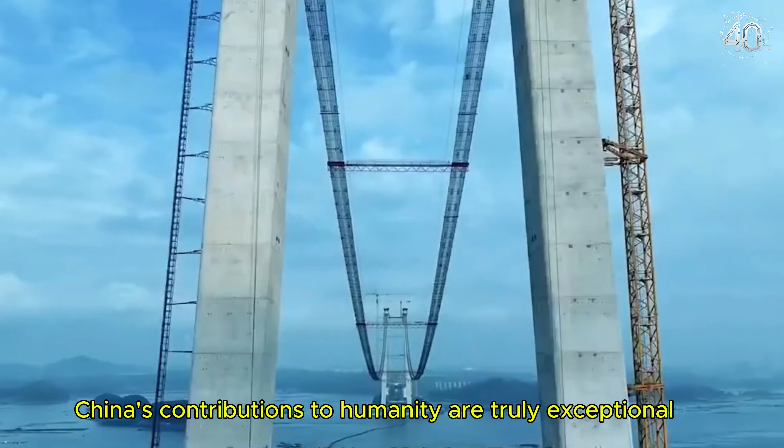It resonates with millions of people. China's contributions to humanity are truly exceptional, from revolutionary advances in technology and science, to promoting peace and harmony in a rapidly changing world. China has proven to be a guiding light for humanity.

Deep-rooted values in Chinese culture, respect for integrity and honor, have become a sensitive beacon for people around the world. Let's bless China, a country that overcomes all difficulties and continues to grow and prosper. Let's cherish its commitment to humanity and its contribution to the betterment of the country and the world, and make unremitting efforts. China's unswerving spirit and deep understanding of human nature inspire admiration and respect.

May China continue to shine brightly, leading humanity towards a better future, a more compassionate future.